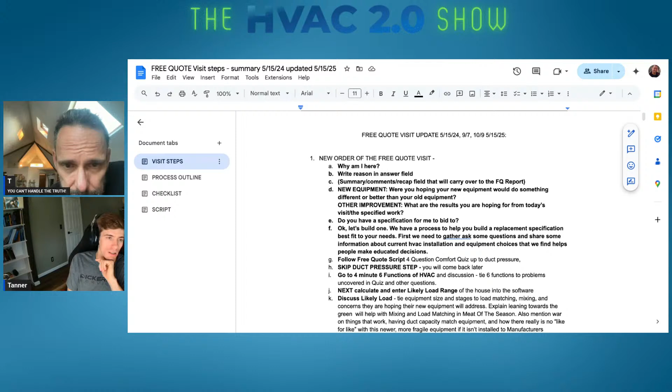Have you spent any time on it? I've read through it, but I've not used it yet. Okay, the last one I did was a modified version of this for someone looking for a whole house dehumidifier. I kind of just took the free quote process and reordered some things because, obviously if they're looking for a dehumidifier, it was new house, new unit, but high humidity, and they come to the conclusion of a whole house dehumidifier.

So I kind of just revamped it in the sense to make it work for that, because I had to lead them to a place of either going, yes, I want a dehumidifier, or no, I want to replace the unit and address the real problem. But that's the only thing I've done so far. I've read through this, but I've not used it yet to really see how it feels.

How do you want to proceed? You want me to read through it or do you want to read through it? You want me to read through it and you can interrupt me in places where you think it needs modification? Yeah, we can just start. If you want to go through it, then we'll take little points where we can talk about it, pick it apart, and that sort of thing.

Okay. Is my cursor showing up? Yeah, it's showing up. Okay, so I'm going to go to the screen.

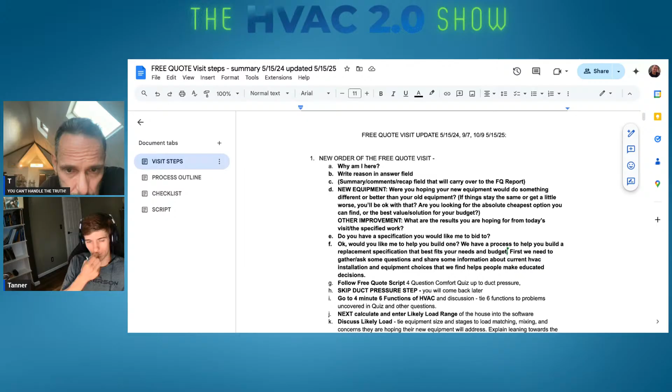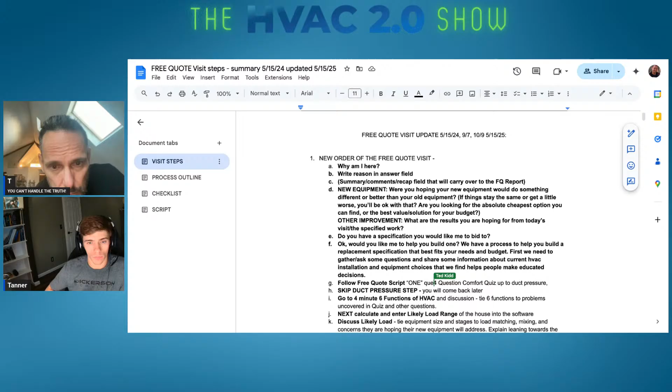I think a lot of that comes back to Sandler, how it basically says that what you want to do is describe their problem better than they can describe it. When they're posing this problem, if you can reword it in a better way, even better than what they're saying, you're more closely getting to that end result. Because a lot of times when people go that route, they're not just looking for the cheapest thing possible. Most people will say they don't want just the cheapest thing because they don't want crap, they're looking for the best value. A lot of times they just don't have that word. Sometimes they do say what's the best bang for my buck. I feel like that's a strong thing to get to when it gets to that point.

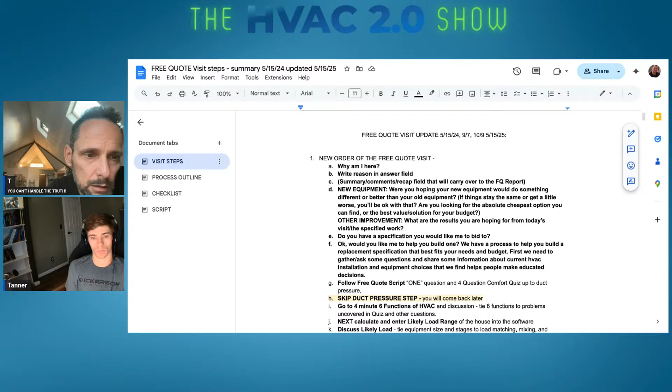Okay, now this, I think, soon we're going to get this reordered, at least in the visit script. I think it's sort of in the right order in the report. Let me go in there. Let's take a look.

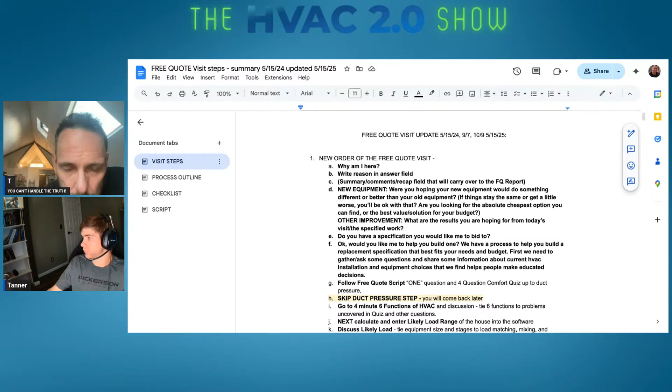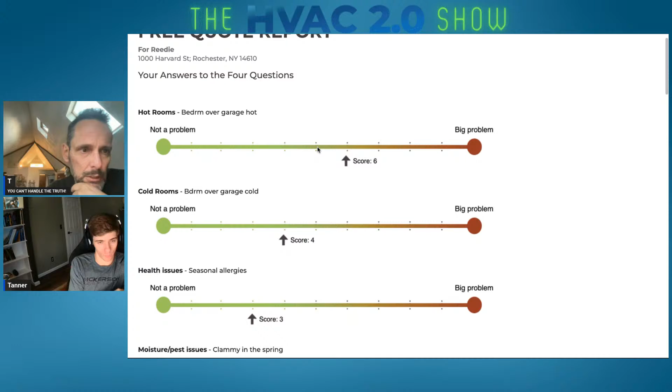So this is the order of the report. Let me see if I can share that as another... present. Yeah, okay, here it is. So this is the Reedie sample that we built a long time ago, and this is going to get filled in some more, so it has some explanation.

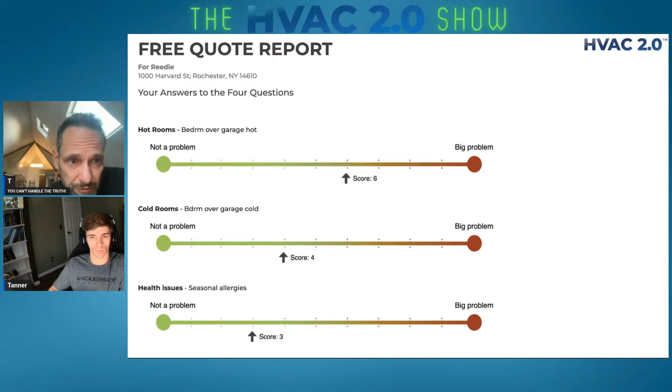Here's the 4 questions quiz, and in front of it's going to be the answer to the one question: were you hoping your new equipment's going to solve any problems that your old equipment didn't solve, or however we end up with the final wording. What do you have final wording for that you're comfortable with?

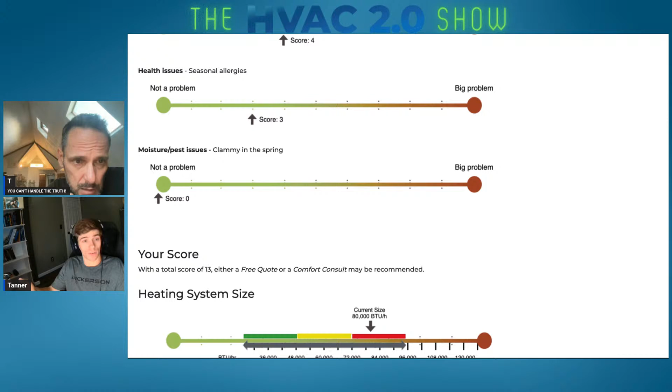Nothing, I don't have any. There's not anything that I'm like, yes, this is absolutely it. Because I could see it being 'is there anything that you're hoping the new equipment is going to do that your old equipment didn't,' or maybe 'is there anything that you're expecting new equipment to fix that you've been frustrated with about your old equipment.'

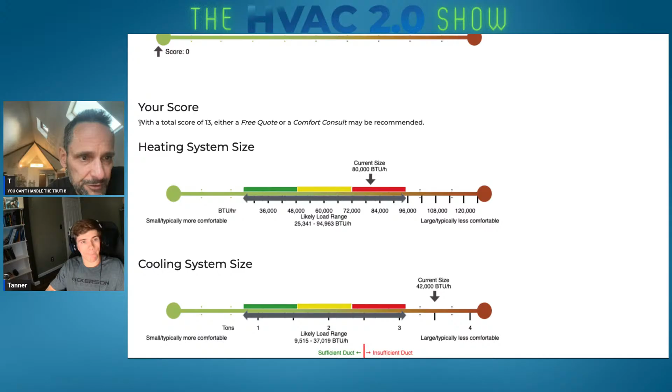We have to fix this score thing at some point. I think we'll probably have some wording in the drop down for the questionnaire that explains that a lot of people are in a hurry. They're probably going to need like a 35 or a 30 for it to be a pivot to a comfort consult.

What if we did a range with that as well? Like 0 to whatever the max, let's see, I guess it'd be 40. 0 to 40, and it'd be like from 30 to 40 being a red zone of severe problems, opposite end being no problems, yellow in between the two.

And then you might have a bracket that says, I guess it's possible you could have a house that really is too expensive to fix, so you need to take them to Comfort Consult because what they really need is a comprehensive planning process. A house like that might need larger equipment, but this seems to be the predominant problem these houses are having, right? Insufficient duct. So how many houses are you going to run across that are not only in the red, but it's going to be way too expensive to move them into the yellow or green with some envelope improvements that are more expensive than replacing the whole ductwork?

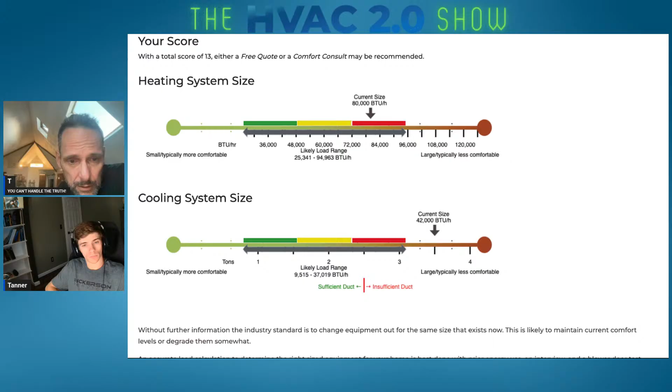Which I've seen, spending $20,000 on ductwork you don't need instead of encapsulating your crawl space or your attic. That's going to be pretty... we haven't seen that, that's a unicorn. I mean, I know we need to assume that it exists, but it feels like that's probably pretty rare.

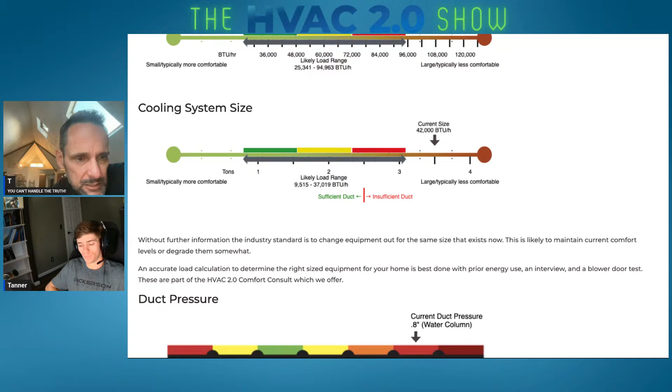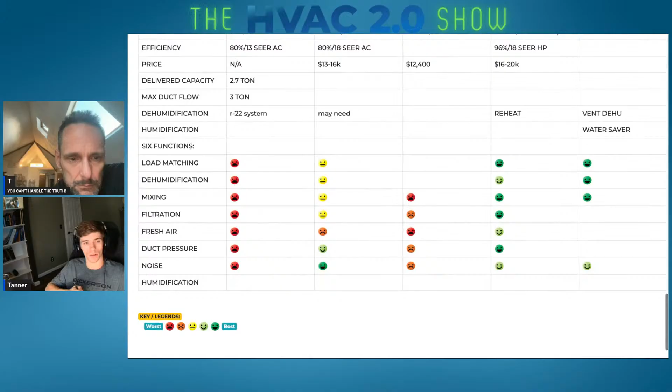But also, it's rare, at least from what I've seen, for people to really give a high score on the four questions, especially for what we're targeting with this free quote process, because most people are already hesitant. Well, and most people, let's assume they do have some issue, say you have this bedroom over garage that heats and cools poorly. You typically are going to have decently high scores for hot rooms, cold rooms, but then the health issues and moisture issues are going to be typically low.

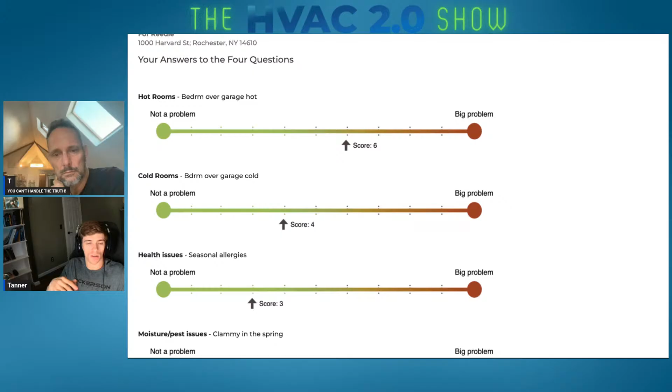So even if you max them out, mid 20s is about as high as that type of situation would be. It's going to take a really screwed up house with health issues you're dealing with, known moisture problems, all in the same go. If you have that going on, you definitely need to go to Comfort Consult because you need that pre-step to the CPP, or at least to get a sense of what direction to go. Is it just messed up HVAC, or do you have certain rooms with crazy leaks you're not aware of? So we're going to need zonal and we're going to need blower door.

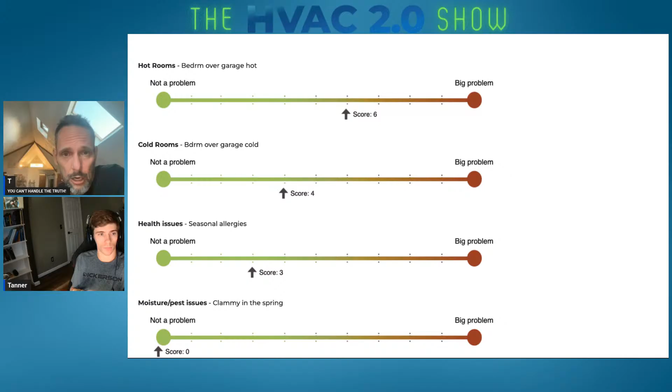You can't go to a homeowner and say, well, we need zonal and blower door. So how nice would that be if they could just, you know...

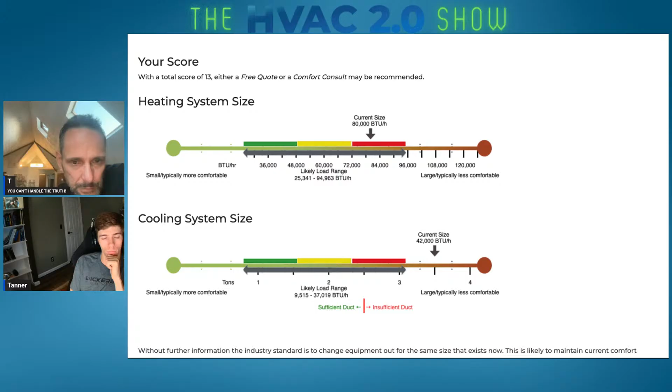Okay, so then the heating system. I think Eric's done a nice job with this, and I've actually been working on the narrative. This narrative, I think, has to really be look.

Even if you size to the yellow, if you're selling single stage, you really got to lean to the green. And even if it's two stage, the lower stage should be to the left of the green so you can get some low, long runs on that low stage. Because what people are seeing out there is they're going out to a 3.5-ton single stage and replacing it with a 4-ton two stage. That would be this situation right here, 42,000 BTU, and they're going over to here. Well, on low stage, you're still up here, which is insufficient duct

and grossly oversized, so you've got short cycling and no dehumidification. So what we really want - it would be worst case to go 2.5-ton two stage, because then you're not even getting into the yellow, which is likely going to be short cycling a lot. I don't think - it's sort of feeling like most houses, even with comfort consult, are sized in the green, unless they're pretty darn leaky. Would you say that's fair?

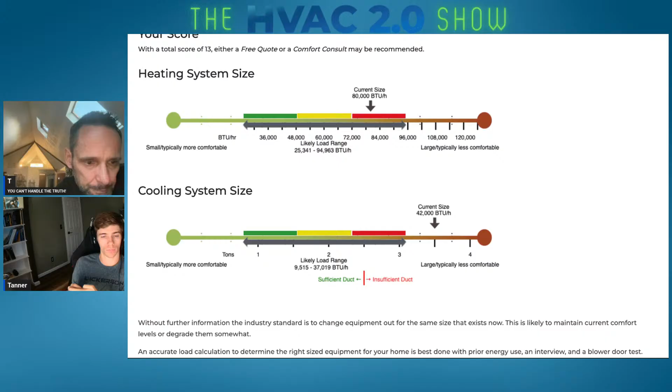And this likely load range is about worst case, not common case. And I think tying static pressure to insufficient duct, offering Measure Quick so that people can see third-party verification that their 4-ton system only delivered 2.5 ton of capacity, it's going to make all those light bulbs go off.

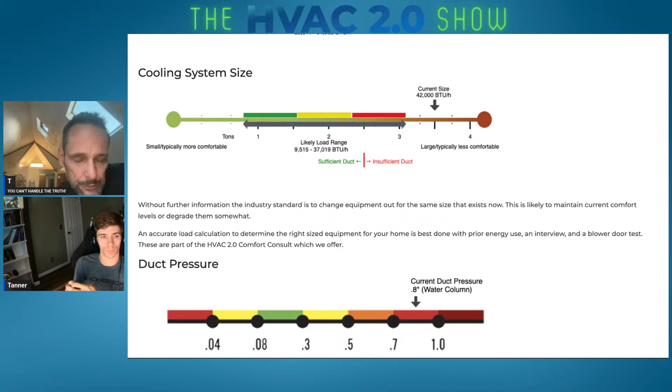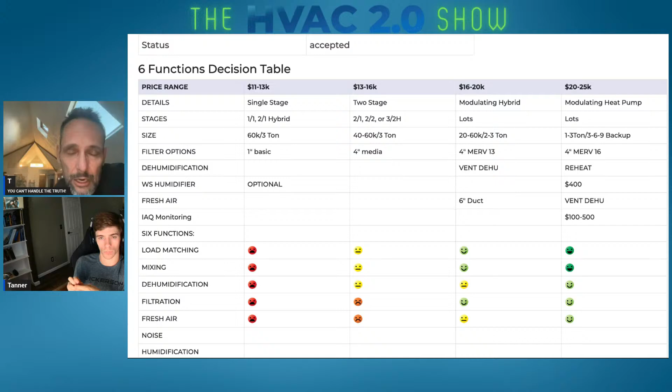And then the 6 functions decision table - this is helping them build their specification by helping them narrow in on: oh, the modulating heat pump is definitely out of my price range. So could I reach and do a modulating hybrid? Maybe. 2-stage is kind of in my price range. Okay, so let me see what the 2-stage gives me.

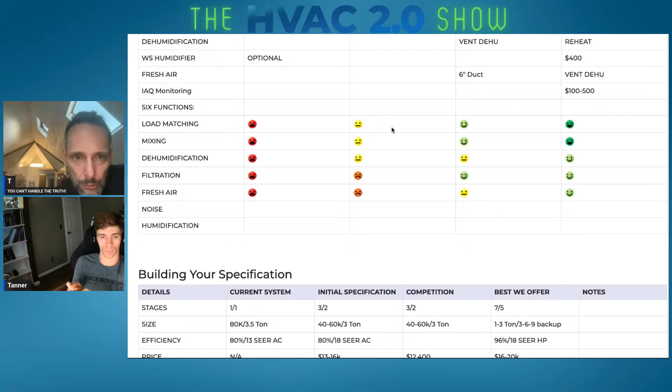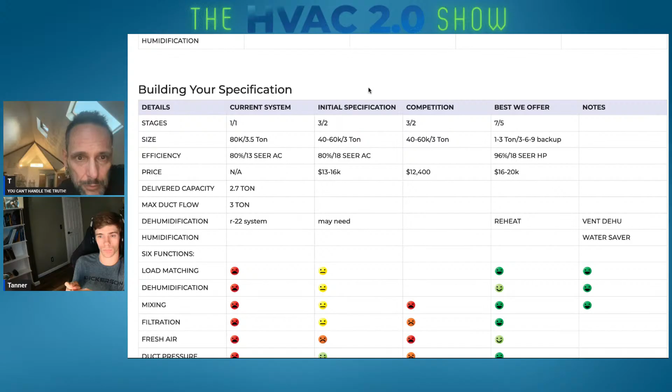Okay, so I don't have any of these things now. I don't have load matching, mixing, dehumidification. I have terrible filtration and no fresh air. But this will be better because it'll run more continuous. And so you move down to building your specification, and again we compare their current system and the initial specification that they were interested in, clarifying that they may need supplemental dehumidification because this equipment still may not run long enough, or depending on what equipment you get, it may just be continuously trying to run a cold or a warm coil.

I mean, Bosch is not ever going to give you dehumidification, even if it runs continuous. Conveying that they could have had reheat if they went with a Greenspeed heat pump, and that with the hybrid, really all you give up is reheat.

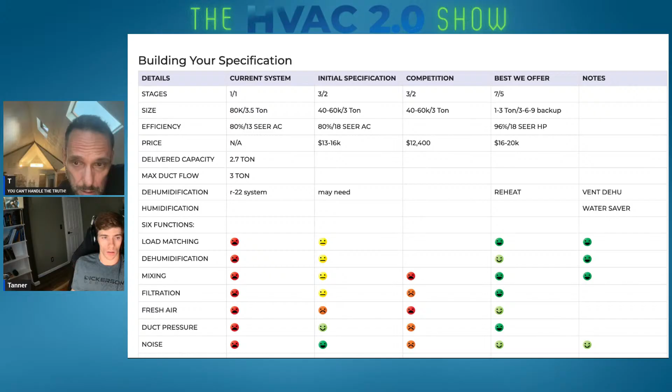I gotta fix my smiley faces here. I just built this haphazard.

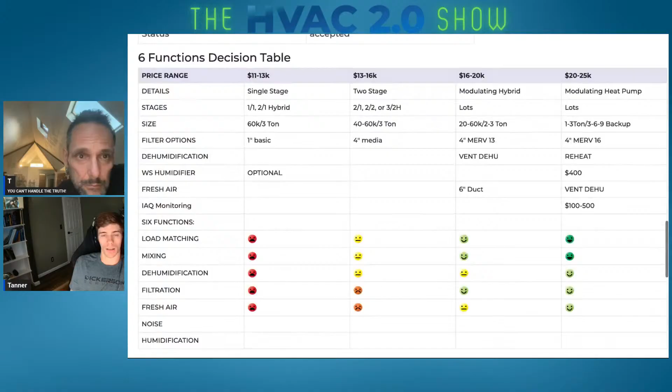Yeah, and using some of these as well, like when you're talking likely load range, for me what I've found is if you go to someone's house for a free quote and you've never been there before, that's a more difficult hurdle versus if I've already been there several times and already did a MeasureQuick report, like hey, you've got a 4-ton unit and it's only doing 2.5 tons of cooling.

At least the ground's already tilled. Yeah, because it's different if someone knows they have a 4-ton unit, but they know it's only doing 2.5 tons of cooling. When it gets hot and they've got in mind that their 2.5-ton unit is keeping up even when it's really hot, it's going to be easy for them to feel comfortable sizing into the green.

If that's not the case because you've never been to the house before, and if they're uncomfortable sizing that single stage into the green, you can say, just so you know, here's where we'd be at if we size to a 3-ton instead of the two. And if needed, what would it look like if we added a dehumidifier to help with the other humidity load? What do you think about that?

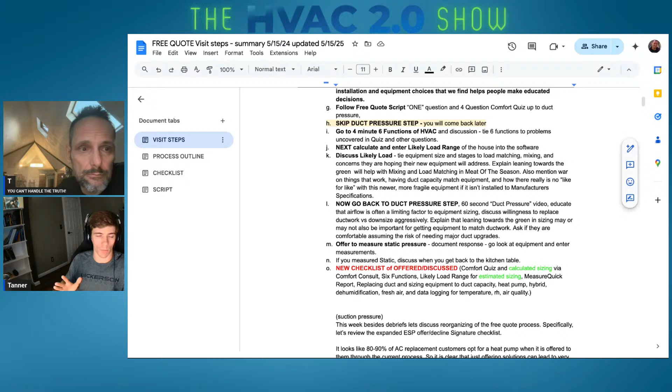Then you can open up the conversation and say, just so you know, over here in this far column where we add this, if we needed to add this in the future, here's what that looks like. We know that will help take care of things. So if it makes you feel better, just know this is roughly what the cost is for that. That way you can pre-lay out some of these things depending on what they're most worried about.

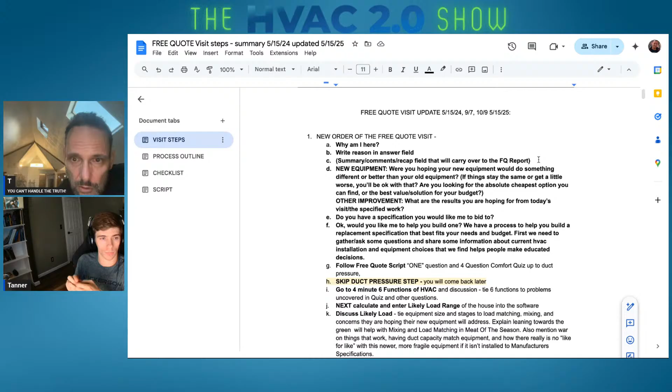Hmm. So one of the things I'm also thinking about in this process is that maybe you tell them up front.

So today I'm here to help you with our free quote process. We also do have a service called a comfort consult, but...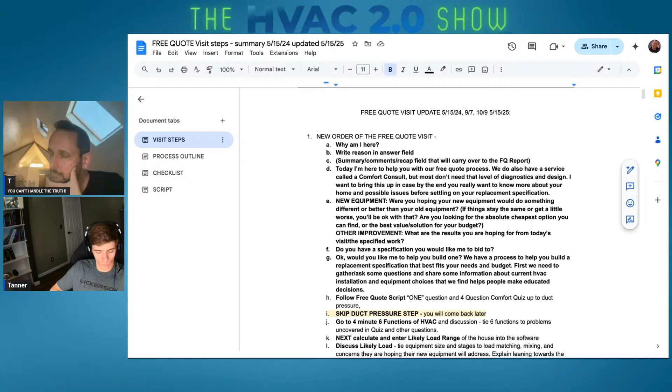So this gets us to the duct pressure step. That's going to get shifted. I think that gets shifted. Well, mostly that video is going to get shifted below the 6 functions video.

So that you've had a chance to help them understand the 6 functions, see if there are any functions they don't have now that they'd really like to have with their new equipment, and get them prepared for the tables where they'll understand the equipment that matches the 6 functions.

But then before you go to the tables, we need to bring in likely load range. And then after likely load range, we need to bring in duct pressure. So okay, you think you need to do the likely load range exercise before you do the duct pressure?

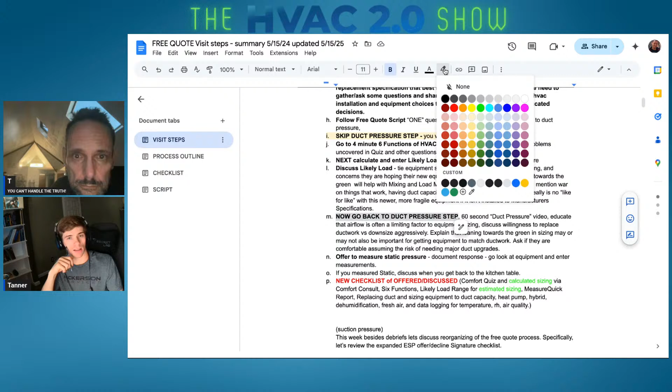Likely load range is going to be something that needs explained anyways, and being able to hold off on the duct limitations and layer that in after you get through the likely load range may make it easier to understand and a little more clear. I think people need that drop dead mark - you probably have sufficient ductwork and you probably don't.

The other thing that we're adding to the static pressure is it's got a bunch of check boxes, because when you think about the airflow of a system, there are a number of ways to arrive at an estimate with ever increasing precision.

Some people can arrive at an estimate, they've done enough duct testing, they can arrive at an estimate just by looking at the duct. But that's going to be a low confidence duct assessment that's provided for free as part of the free quote process.

Maybe you pull out your tape measure, measure it and calculate it from the supply and return trunks. I would think that would also be free, but you'd be able to notate it. And then the next one is to take static pressure, and then the next one is MeasureQuick, and the next one is MeasureQuick with TruFlo.

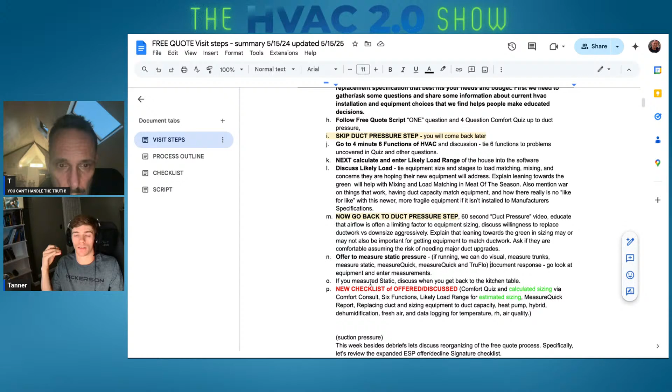And really, I feel like you're wanting to convey that the best you can, because at the end of the day, the only way it can be 100% - if they come and say price doesn't matter, it has to be dead nuts perfect - the only thing you can do is tear everything out, design it, and install it the way that it should. So we know that for a fact. We also know we have no clue if we just tear out a unit and put in the same exact size. So anything in between, you have to approach it from a place of, okay, we're not dealing with certainty at any point.

So you just want to convey, hey, we checked static pressure, we did this visual inspection, here's what it seems to me like, but I'll be honest, I could be wrong because I'm not designing it right now. I'm just looking at it, going based on experience. Here's what I've seen. I'm conveying this to you - what do you think of that? I'm not measuring airflow at the room.

Yeah, I mean, there's a lot of things that we could do, but it's going to take a lot of time and a lot of investment on your part to do that level of due diligence. And...

We're finding that offering this process tends to help people understand what they need to understand to make good decisions and get outcomes that they're very pleased with, as quickly and concisely as possible.

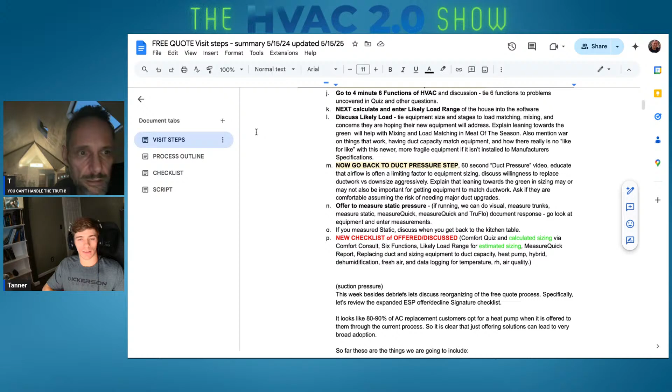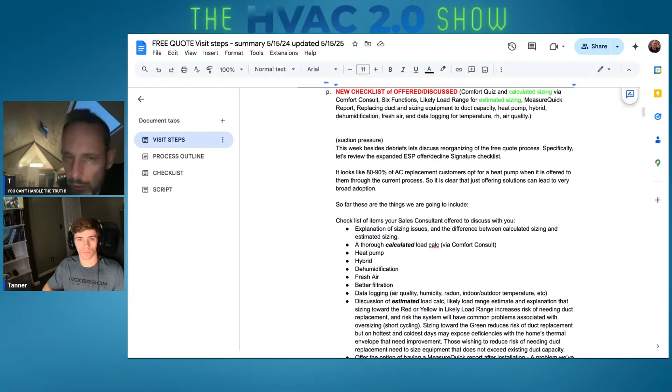I don't know why I made a note of suction pressure. It was sort of random - I remember typing it but don't remember why. I was like, oh, I need to remember that for some reason.

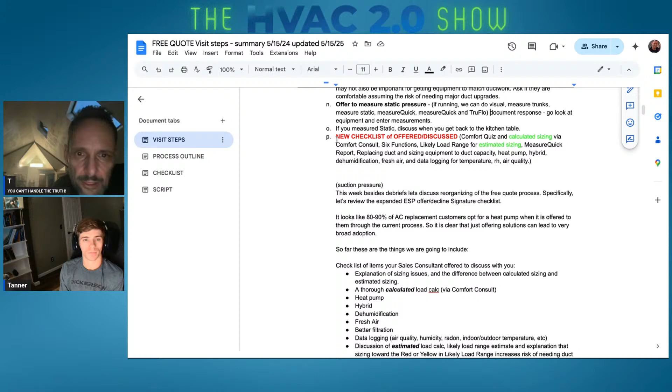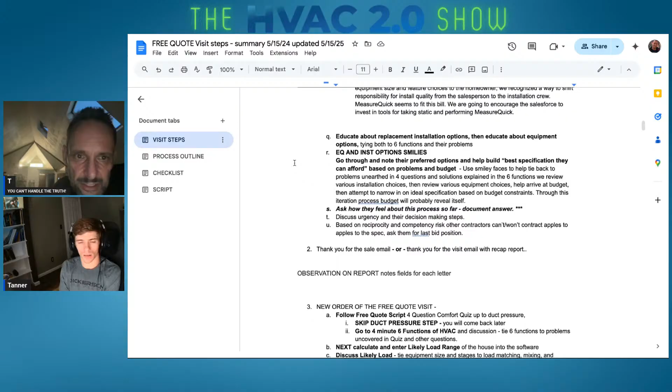I think the checklist of offered and discussed needs to come after the tables, kind of at the end. It should be a recap - you're once again going, okay, here's what we talked about, here's what you told me, is all that true? For the second time you have told me these same answers.

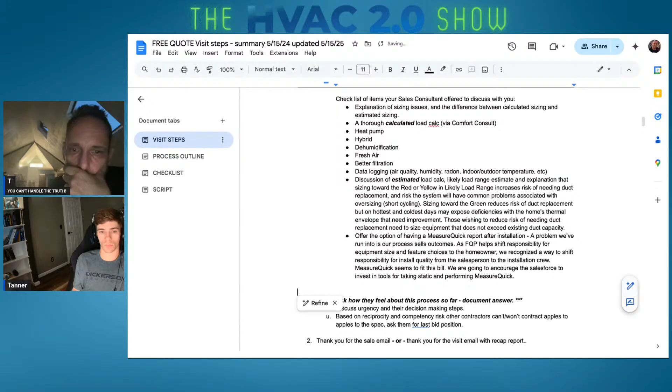Because one of the things you want to make sure - I think you always need to offer a heat pump with reheat. And that would be a checklist item. I think you always need to offer a heat pump as a hybrid if they want a furnace.

Yeah, I just want a furnace and AC. Well, what a lot of people are doing is putting heat pumps on their furnaces, that's called a hybrid. Would you like to talk about that? The way I do it is I say, okay, you want a furnace? Yeah, we can definitely do that. But also, just so you know, all the furnaces I do, I also install a heat pump with it, so you get both at the same time. Some people do like to opt to downgrade, but it's about the same price, and you're just losing benefits. For me, I know people in colder climates where heat pumps aren't very common.

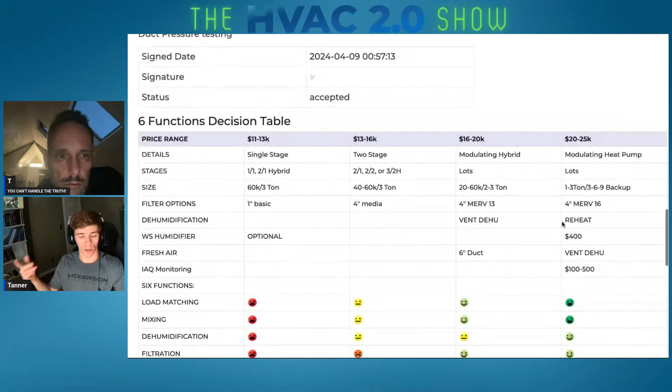Heat pump to AC price difference is a lot bigger there. For me, it's not much difference. I basically keep the prices essentially the same. And if somebody chooses an AC furnace combo, I just make 1% more margin just because it's additional pricing I've got to go through. It's just not worth my time and effort, because most people are not going to say no to extra functionality with zero downside.

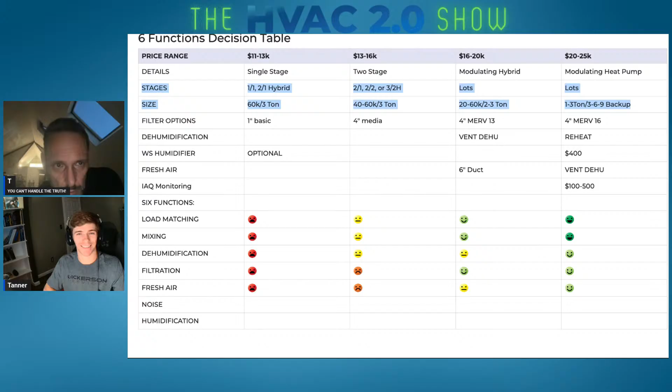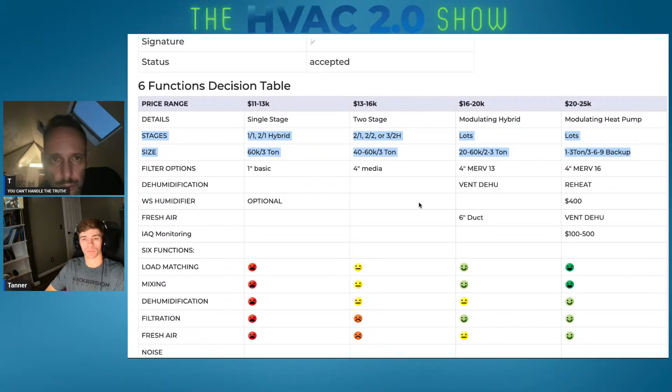That actually leads to the way I think we want to communicate stages and size. Because a two stage furnace would be 40 to 60K, and you've only got a 3 ton. But if you get a hybrid, that heat pump could end up being the low end of your heating load. So this is the guy's furnace, and if he had a 3 ton heat pump, he'd also have a 36,000 BTU stage - he'd have a 3680 on the heating side.

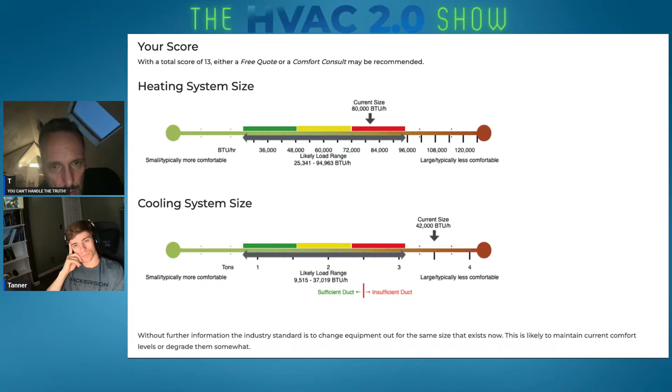I don't know, maybe I should add more info there. For that part, I've always just kept it simple with this option - here's how many stages, or which I call speeds. Granted I'm mostly doing heat pumps, so with a furnace you'd want to call it stages, but I just go heating slash cooling, and do 2/1, keeping it super simple, because when I start adding too much it just gets very convoluted.

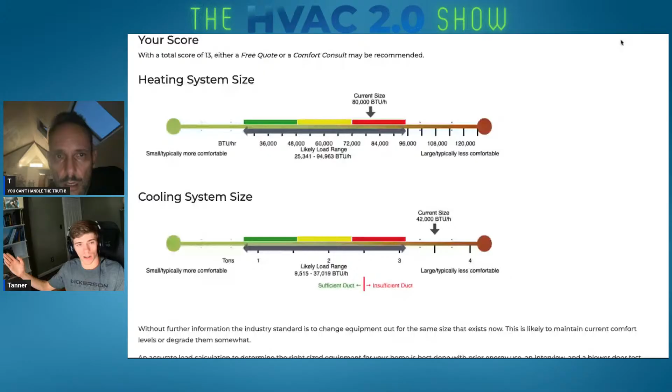They're just like, what does that mean? Because it's difficult enough to go, okay, Daikin fit, which is in the middle, to a 5 stage, to fully variable, and then they're looking at it going, okay so variable speed, 5 stage, variable speed - what, why is this 5 stage better than the variable? That in itself was already confusing.

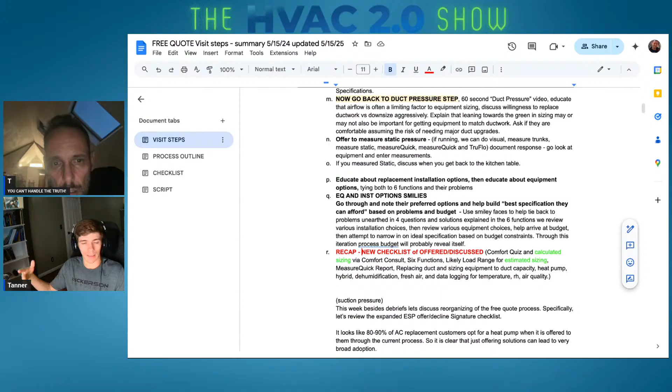That's actually not really a problem anymore because they've gone away from the 5 stage. But in that whole thing, I just kind of came to the conclusion that I want to keep it as simple as possible - illustrate it the best that I can, but not overshare too much, because it just goes too much in a rabbit hole, I feel like.

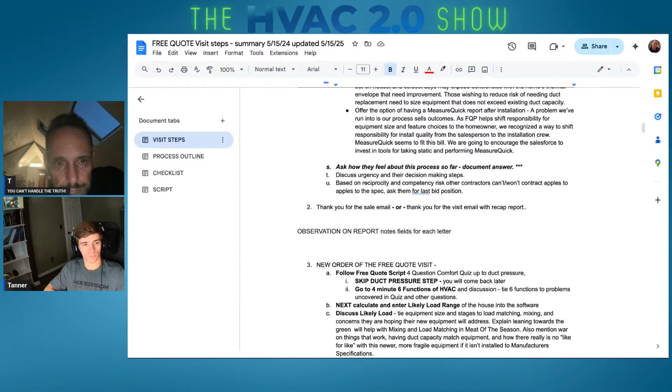So for a hybrid, if you're going with single stage equipment, you're basically taking single stage equipment and turning it into a two-stage unit. So I would translate that to: AC furnace only is 1 stage of heat, 1 stage of cool. Hybrid furnace AC or heat pump furnace is 2 stage heat, 1 stage cooling. That's how I've differentiated the two, keeping it simple like that.

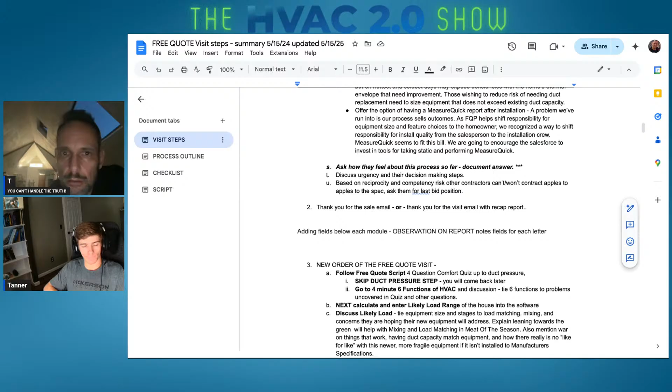Looking back at stages, how do you like how I've done the stages field? Single stage is 1 and 1 stage, or if you have a hybrid, it's 2 and 1 stage - one heat, one cool versus 2 heat, one cool. Then for 2 stage, it's 2 heat one cool, or 2 heat two cool. Or for a hybrid, it could be 3 heat, 2 cool.

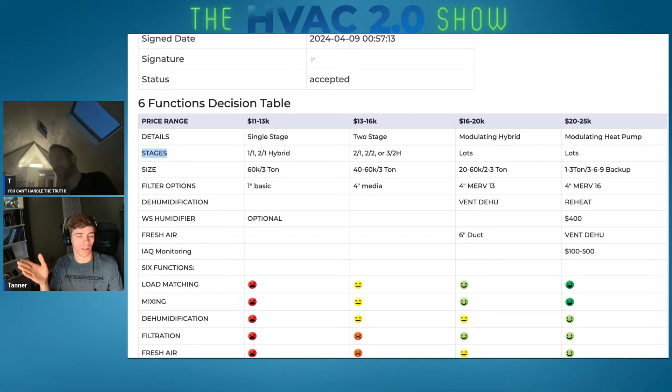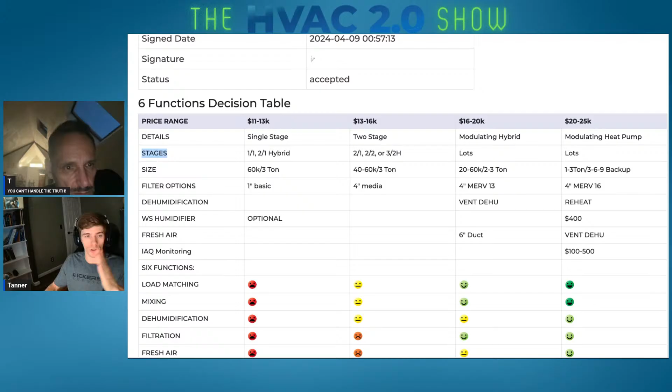For me, that's something that's going to require explaining every time. Since I pretty much offer a hybrid, I'll just caveat it with saying hey, some people do downgrade, but the price is basically the same, so it ends up not being that big a deal - you don't have to get them that educated. I'd just do stages, and beside it have parentheses for heat slash cool, so they know what the numbers mean. I'd go 2/1 for single stage, and two stage would be 3/2. Then I'd caveat with saying some people, for some reason, will choose to downgrade and have less heating stages or heating speeds, but the price is about the same. Worded that way, most of the time people will say oh okay, I'd definitely want that, and then there's no confusion. It's straightforward.

When I talk about size, I'm also adding range of output. Like a 1 stage, 60K, 3 ton, 2 stage would be 40 to 60K, and it might be 2 to 3 ton - I do like that. Modulating hybrid is 20 to 60 with 2 to 3 ton. Then the green speed is 1 to 3 ton. It's actually less than 1, right? It's 7,500 BTU to 36,000.

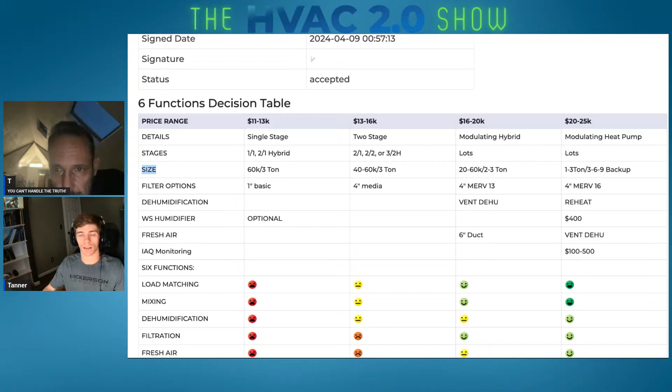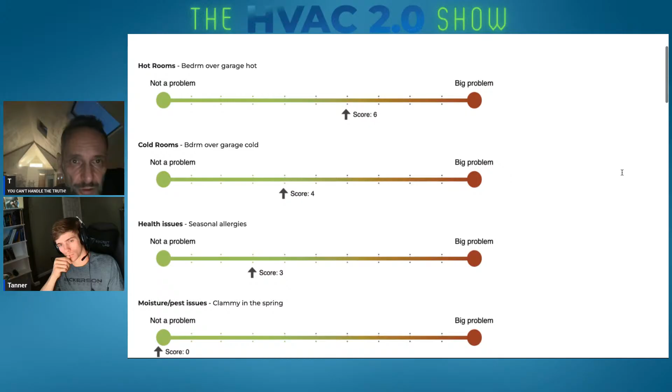That's interesting, I hadn't thought about that also - we were talking about adding the 369 backup, so when we're talking about proposed size, you could represent the proposed size of a 3 ton heat pump as actually being 72,000 BTU or whatever that calculates out to. In your climate they're more used to heat pumps, but in some climates, if you start talking about 36,000 BTU of heat when that equipment is actually capable of producing 70,000 BTU of heat, the chance of losing them is significantly reduced because they don't feel like they're standing on the edge of a cliff. They're not as worried.

I have not done showing the variation of here's the range of capacity, but I like that a lot. I hadn't included the heat kit output added to the heating capacity whenever I'd been doing it. I know Reedy has, and I think that would be the most optimal way of doing it - being able to say, with three stages of heat on a 3-ton heat pump, your heating capacity is from 8,000 BTUs up to 72,000 BTUs. Showing that wide of a range is going to put a lot of people at ease knowing the unit's going to be capable of that. I like that a lot. It allows you to offer, depending on their panel capacity, or offer it anyway and tell them it's just a 369 and a 5, 10, 15.

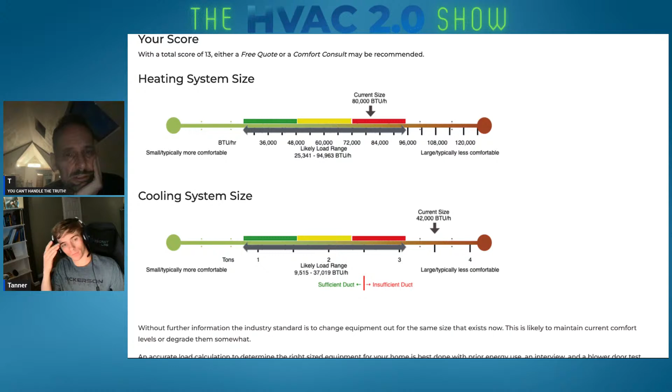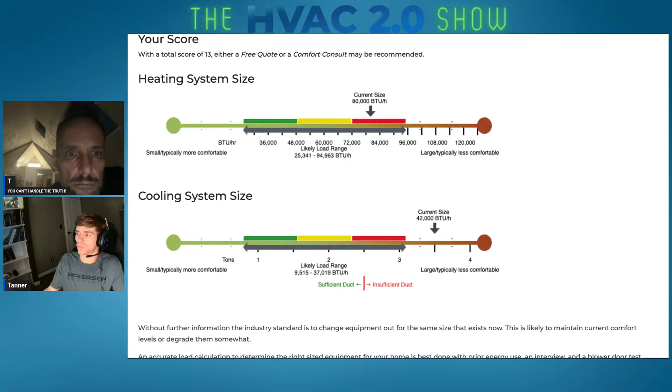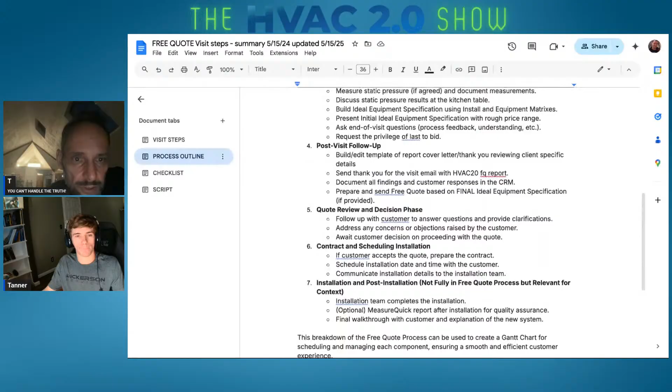Was there anything else? I guess when I'm looking at this, let me go - where is it? I can't even remember where I am. Which I feel like we got through a good chunk of because we have the new process outline. We got towards the end for the checklist, so we didn't go through this, but basically, this checklist is pretty nice.

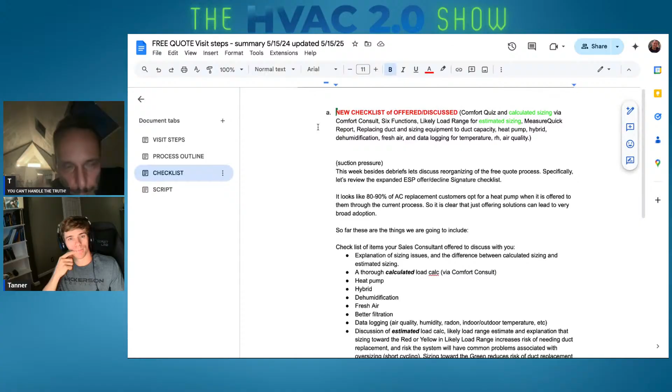This is the checklist that actually is pulled from the visit steps, and it won't be in the visit steps once we get the checklist figured out.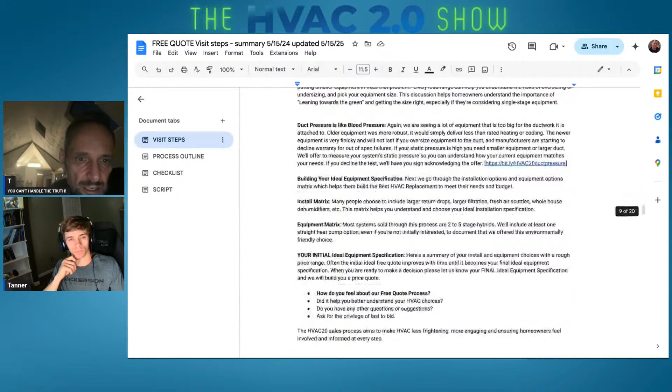This is some of the stuff below the fold. What I've done is when it changes enough, I copy and paste to the top so we can go back through the way it was before. So there's a lot of extraneous stuff there.

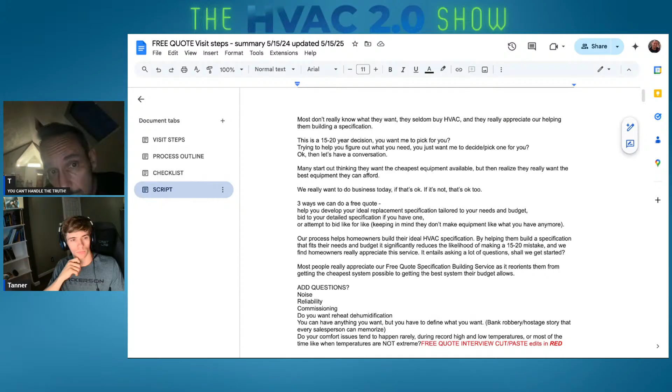So process outline, checklist, and then script, which probably has to get tied back to the visit steps as the visit steps evolve.

For the script, it may have to come down to checkpoints or intentional things, like a bullet point list of what we're trying to achieve at this section, and then some example snippets you can use, because a lot of it's going to be so variable that a word-by-word script might not be doable.

It's like the intention is to find out why you're there. Here's a few example questions you can use in this situation. That way it's guidance steps and guardrails for someone training as a salesperson to get where they need to be, or they can copy paste those and make their own script.

But every time I've tried to follow it... the point of it is to eventually have it be part of the process built into the software.

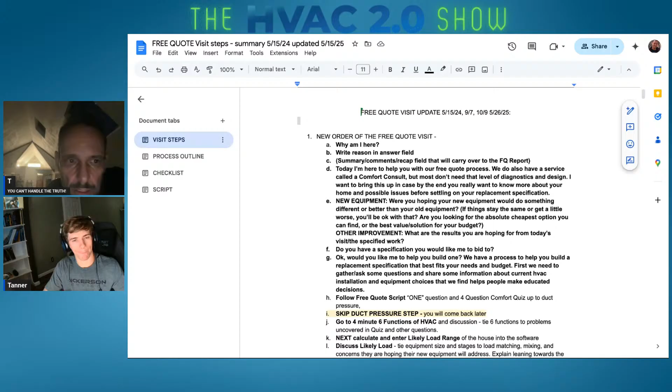Maybe we're just defining script a little, because I'm thinking of a script as being the words that the salesperson needs to say at each step. I think that might be too difficult - it's not the words.

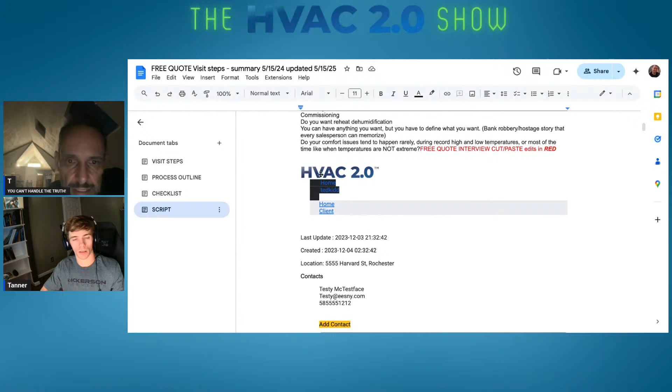It's more just the workflow. The way I put it in here, yeah, it actually is the flow. It does have script in the front so that you set the visit up properly.

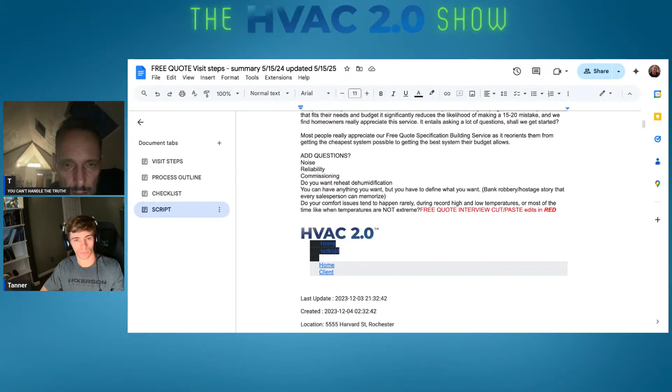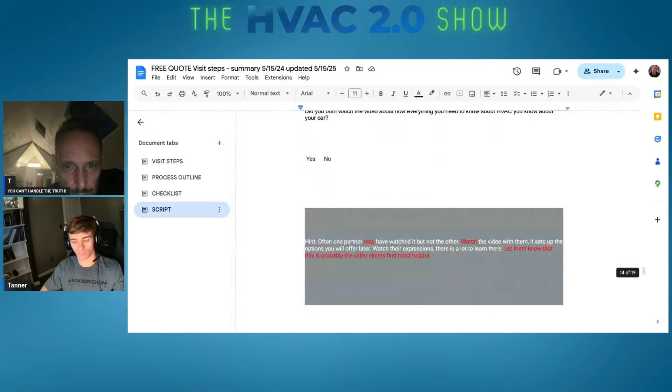But then it goes straight into the software, with the hints. We make sure we get these hints right, get all this stuff in the right order. Somewhere in here is static pressure - get that put in the right order, and how to communicate it.

So really, most of it is not extraneous script - it's the actual free quote processing software part of it.

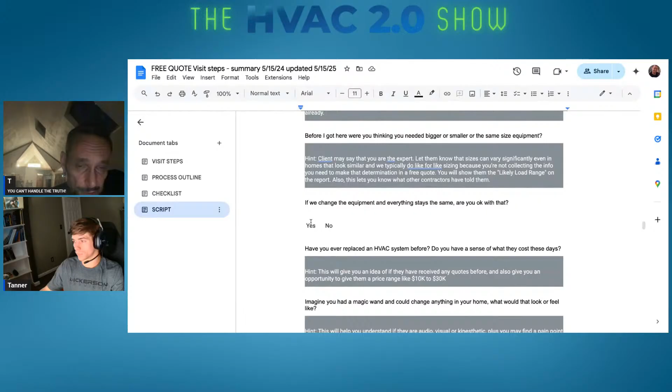I know that once people get good at this, they end up being off script or they have their own ways of teaching certain concepts - I'm totally good with that, but that's more like black belt level.

It definitely is a higher belt, which anyone that uses the process - you're gonna need to get to that higher level to really make use of it, to get the most out of it that you can.

I think there's going to be a bunch of people that use it, and there may be a bunch of people at risk of losing their jobs because their revenue per lead is below 4,000. If your revenue per lead is less than 4,000, it's a Hail Mary.

If they lean into using this, it's going to help, because we've had people have revenue per lead above 10,000 in some months, and have it be very, very high some years.

Reedy's revenue per lead I think for last year was above 9 grand, wasn't it? Something like that - I think it was, which is crazy.